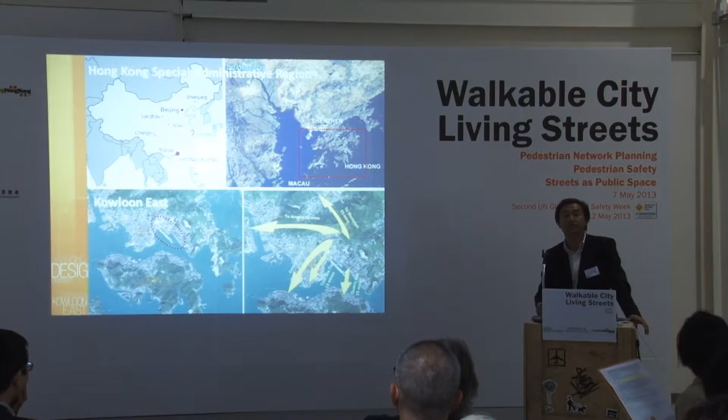This is a diagram showing the local and regional context of Kowloon East, and it's very self-explanatory, so I don't think I need to get into detail. It would just be sufficient for us to note that we are only 28 minutes away from Central, the airport is only 45 minutes away from us, and within an hour we will be in Shenzhen.

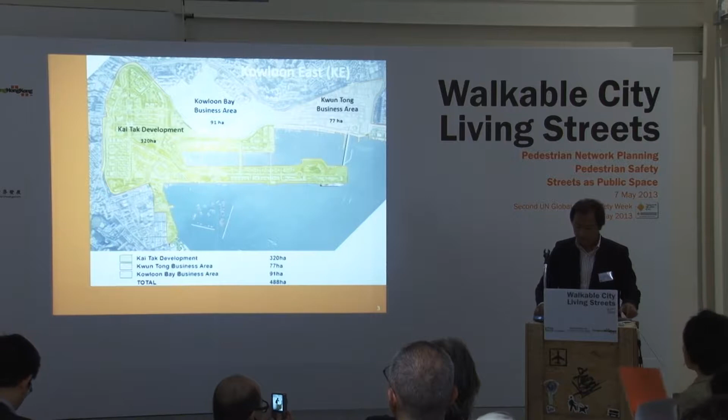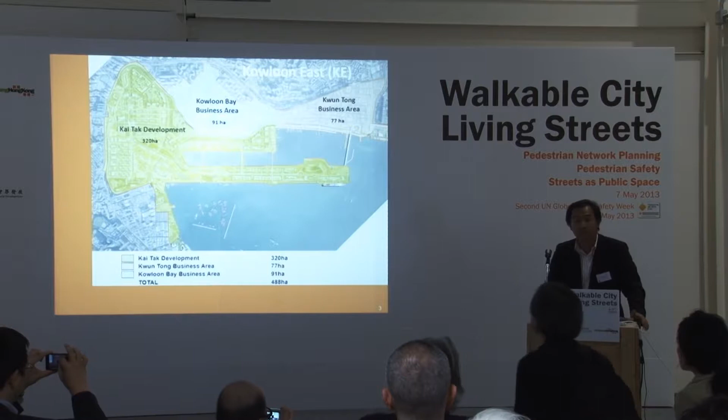Our area covers the Kai Tak new development area, as well as the Kowloon Bay and Kwun Tong business area. While the Kai Tak development area is being progressively implemented according to the agreed development plan, our efforts are mostly nowadays concentrated in the old area of Kowloon Bay and Kwun Tong.

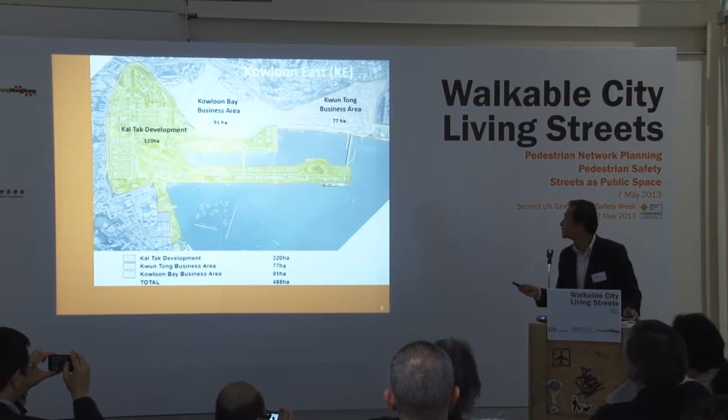Looking ahead in the next 20 years, although there will still be some increase of office supply in the traditional CBD, the Kwun Tong and Kowloon Bay area has the potential of supplying an addition of about 4 million square meters of office floor space. So this is basically the background on why we are having this Energizing Kowloon East office. This office was set up in June last year to facilitate the transformation process of the Kwun Tong and Kowloon Bay area into a more business type of area.

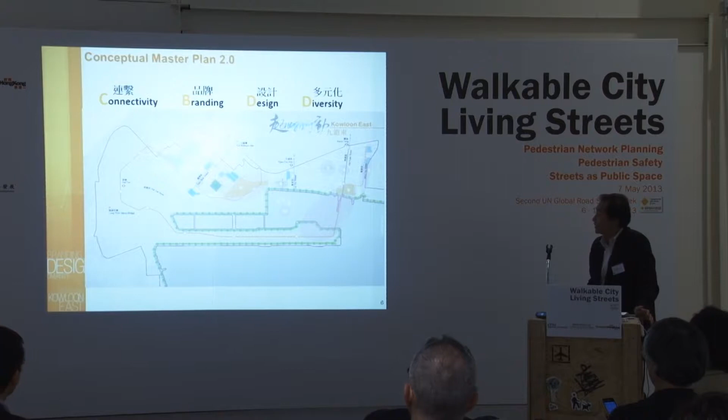So when our office was set up in June last year, we published a conceptual master plan. This conceptual master plan provides a framework to guide all of our actions. It is not a detailed blueprint. It is in fact a living document that will evolve over time to take account of progress of our work, as well as the changing needs and aspirations of the community. However, the 4 core values of the conceptual master plan - connectivity, branding, design, and diversity - will remain consistent in guiding all of our actions.

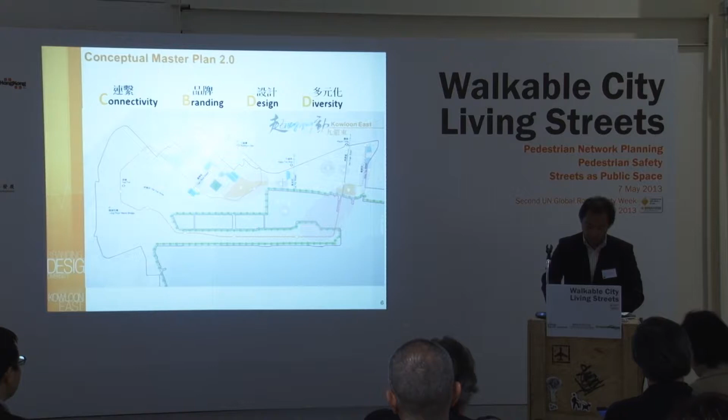In this conceptual master plan, which we call version 2.0, we have come up with 10 major tasks, divided into 3 main areas: enhancing connectivity of the area, improving the area's environment, as well as releasing the development potential.

Today is not the occasion for me to explain in detail our conceptual master plan. However, if any of you are interested, I encourage you to visit our website. In addition, you are also welcome to contact us for any more information.

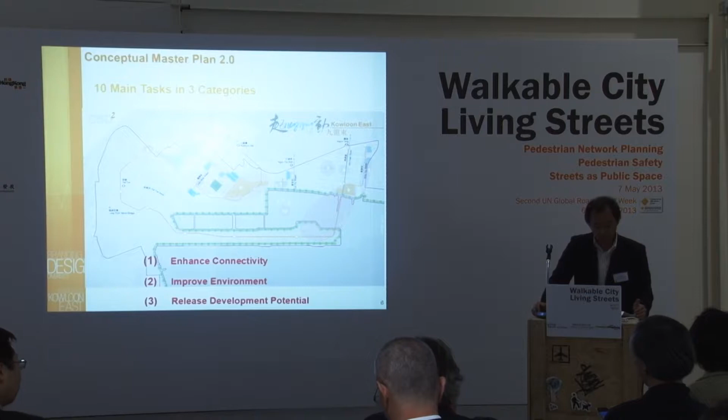So going back to the subject of today's conference, we consider that by making walkable places in Kowloon East, we would be able to enhance the connectivity, as well as improve the environment with good design and catering for the diverse needs of the different stakeholders in the district.

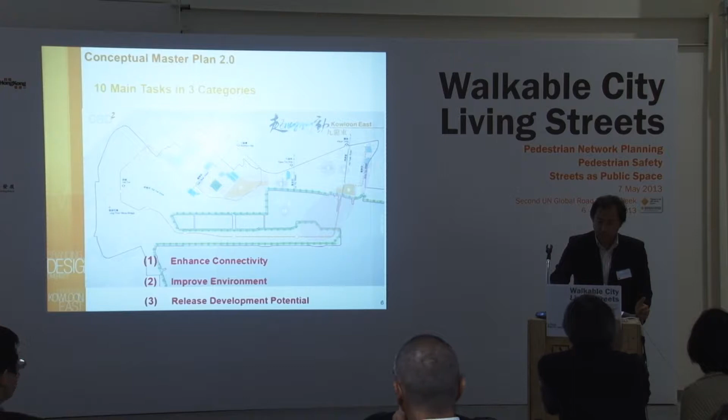So let's begin by looking at whether Kowloon East is walkable or not. For many people, I gather it may be the first time you are in this part of town, and you may not be very familiar with what the area is like. But for those who are familiar with this area, you are certainly aware that the current situation leaves much to be desired. So just to give you an idea of what the area is like, I'm going to show you a video clip on typical junctions within this area.

You can see vehicles and pedestrians come and go. Just a few more photographs to let you have a feel of the pedestrian environment in this district. We have very busy pedestrian and vehicular traffic, a little bit more congested sort of traffic situations.

This type of double parking, on-street loading and unloading activities are really common scenes within this area. I think the lack of loading and unloading facilities, or lack of pedestrian crossing facilities, and the vehicular and pedestrian conflicts in these areas are really making it probably one of the worst walking environments in Hong Kong.

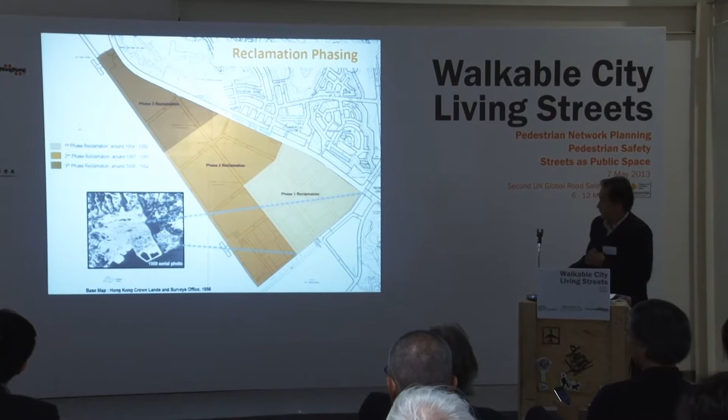The first phase starts from this corner. This is Kwun Tong Road, on the edge of the Kwun Tong industrial area. We have King Yip Street, we have a nullah there at the moment. So it progressively started from this side, going towards the western side of the area.

The next photograph I'm going to show you is the scene of this area in 1961, probably before many of you were born, and I was lucky enough to be in this world then. So we can see that this area has relatively narrow pavements and very few greening and landscaping facilities.

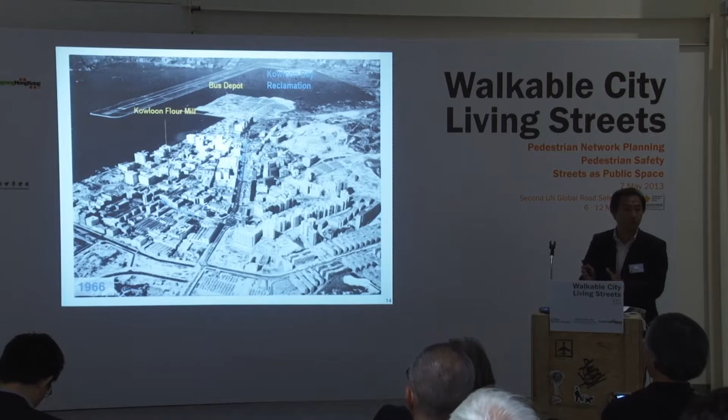This is another scene from 1966. You can see that by then, more or less the entire industrial district had already taken shape. Within there, we have narrow pavements, very few greening, probably non-existent landscaping facilities, and off-street loading and unloading facilities are also missing in many of the older industrial buildings we have around here nowadays.

The lack of this type of supporting facilities may not have been a problem back in the 60s and 70s, when the other facilities within this area already served very well the various needs of the industries and factories back then. At that time, you may recall, Kwun Tong was one of the most important manufacturing bases of Hong Kong, and it produced over one-fifth of the GDP from the manufacturing sector.

However, as the area is being transformed into a more business-oriented area, the problem shown to you earlier, with pedestrians and vehicles fighting among themselves for space within this area, has become more apparent. It is important for us to understand the nature of this problem, and that we are in fact dealing with problems that are the legacy of the past success of Hong Kong.

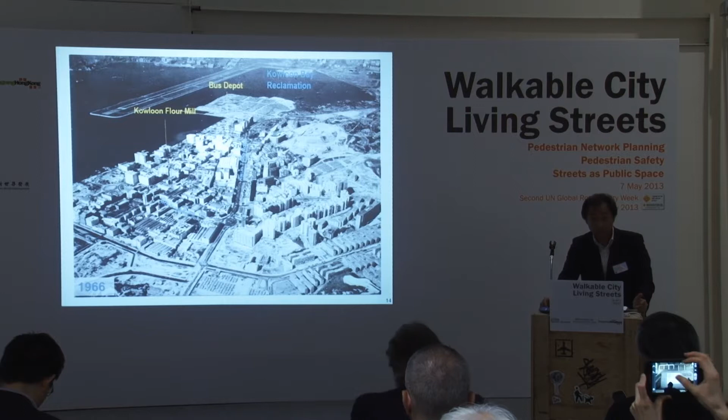But time has already changed, and we must move on in managing this urban transformation process. Understanding the nature of this problem has enabled us to realize there would not be a single, simple solution to these issues. We are progressively adopting a place-making approach in addressing these issues, embracing both short-term and longer-term measures, to facilitate the transformation process of Kowloon East.

Consistent with EKEO's working style, we started off by looking for simple, easy to implement, and effective quick-win solutions. We formed an interdepartmental traffic focus group, under the lead and steer of my very capable deputy head.

She made very good use of a soft and feminine touch in convincing all our macho and masculine works department colleagues to agree to undertake a lot of quick-win measures.

Since the formation of the traffic focus group, we have investigated and implemented a large number of short-term improvement measures. Just a few examples include widening footpaths, improving traffic signals, similar to what Neil discussed with us earlier before lunch. We have also tried to improve pedestrian crossing facilities, and tried to remove or relocate some of the obstructions on the pedestrian pavement.

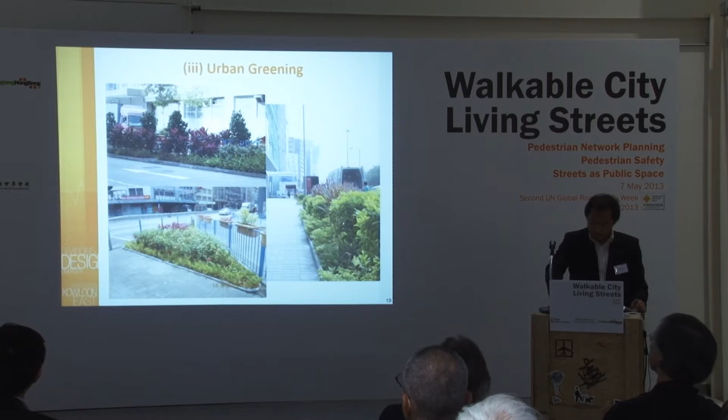In addition to the quick win measures, we have also commissioned a pedestrian connectivity study in Kowloon Bay. The consultants were commissioned in February this year, and we are about to commence the first stage engagement later this month.

The main strategies we adopt in this pedestrian study are mainly to enhance walkability to encourage people to walk within the area, to improve traffic so that congestion and its conflict with pedestrians can be minimized, and to facelift the pedestrian environment so that people would find it more comfortable and enjoyable to walk along the streets in Kowloon Bay.

Regarding the short-term measures, some of you in this room may have experienced the congestion problem coming out from the Kowloon Bay MTR station in the morning when trying to gain access to the Kowloon Bay business area. This photo shows a very, very congested footbridge.

We have already instructed the consultant helping us to identify a solution to divert people to other routings in order to gain access to the Kowloon Bay business area, ahead of completion of the studies.

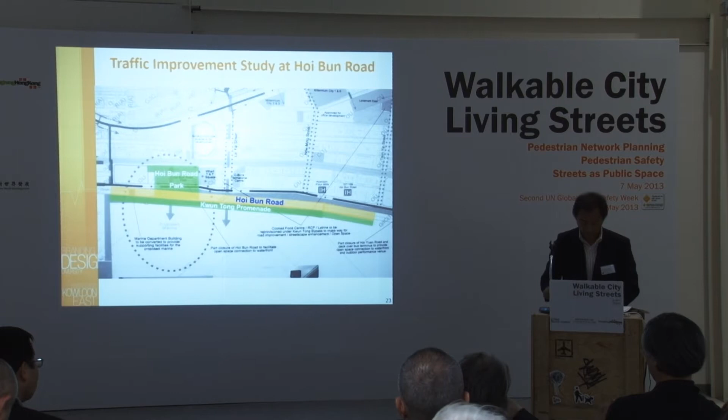Very, very quickly, let me share with you two other place-making projects that we have undertaken.

This picture is the Tsun Yip Street Playground, located right in the middle of Kwun Tong. It is currently occupied by concrete soccer pitches and basketball courts, with hard metal fencing all around the open space.

These facilities served the factory workers well before, but now, as the area is progressively changing into a more business-oriented area, they may not be the best type of facilities for white-collar workers. So we undertook an experiment.

We call it the Playful Thursday event. We partnered with the Agriculture, Fisheries and Conservation Department from October last year to January this year to bring in organic farmers from the New Territories to sell their organic products. We also invited local artists to perform for 12 consecutive weeks, every Thursday. Our intention was to see whether we could change people's perception of making use of this public space.

The results were very encouraging. Over 42,000 people attended this event, and on average, every Thursday, over 3,000 people attended. This prompted us to proceed with facelifting proposals for the playground, providing more greening and facilities more suitable for the business environment of the area.

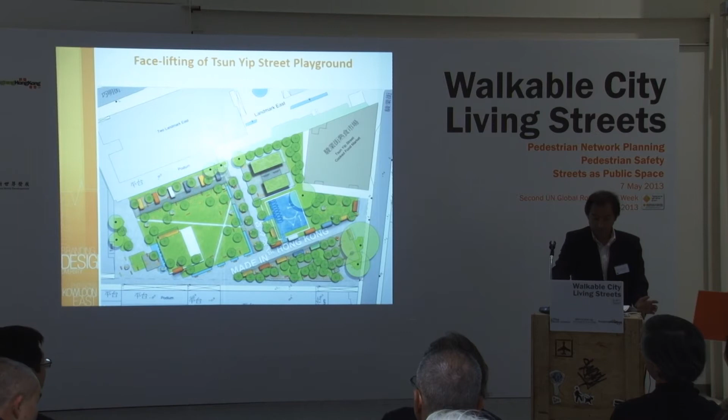I only have one more minute, so I will quickly flip through another place-making project we have. This is basically where you have been during the lunchtime forum.

Just to show you these pictures, on the top side is the scene you see in the area in June last year. In the bottom pictures, it was taken in January this year. We have roughly taken 6 months to turn this area around and open it up for public use.

Many events have already taken place in this sort of venue, and looking ahead, there are also other sites underneath the flyover, and we will continue to examine the possibility of making these sites available for arts and cultural activities.

So I'm moving on to the last part of my presentation, to share with you what sort of challenges we think we are facing. We are a very, very young organization. We are exactly a month away from being 1 year old.

During the last 11 months, we have been trying hard to establish ourselves and get prepared for the challenges lying ahead of us. Based on the limited experience that we have, we consider our main challenge is the high volume of traffic, both pedestrians and vehicles, that we have in this area. It is already difficult enough for the existing infrastructure and public facilities to cope with this amount of traffic, and with the progressive transformation of the area, the problem will only be more acute. Yet, we have very, very limited space to maneuver.

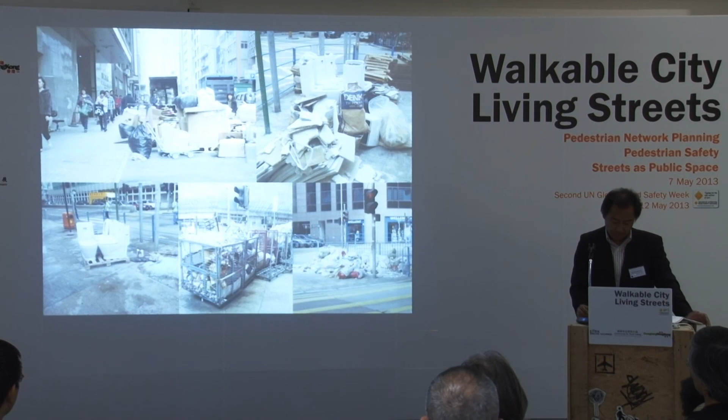So it seems to us that purely working on hardware measures will not help us in making walkable places in Kowloon East. We will continue our efforts in taking care of the software measures as well, and we believe that if we can make Kowloon East a better place to walk, a better place for people to stay and work, we will be able to attract talents and investment, and we will be able to bring people together, provide business opportunities, and make Kowloon East an attractive alternative core business area of Hong Kong.